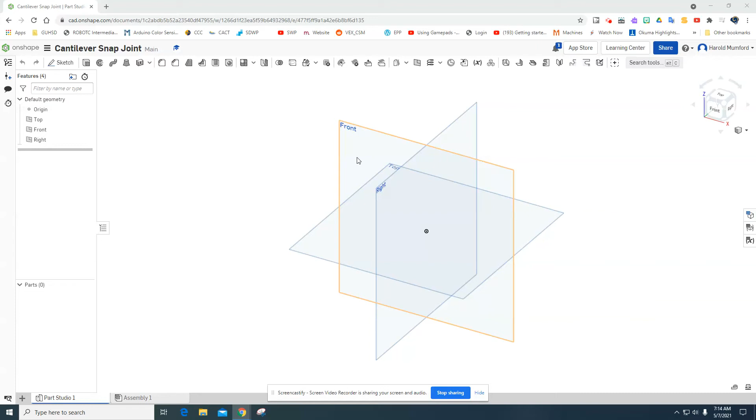Okay, I'm here to show you how to make a cantilever snap joint. Go on, click on front, click on sketch. Click on the navigation cube and bring it to the front.

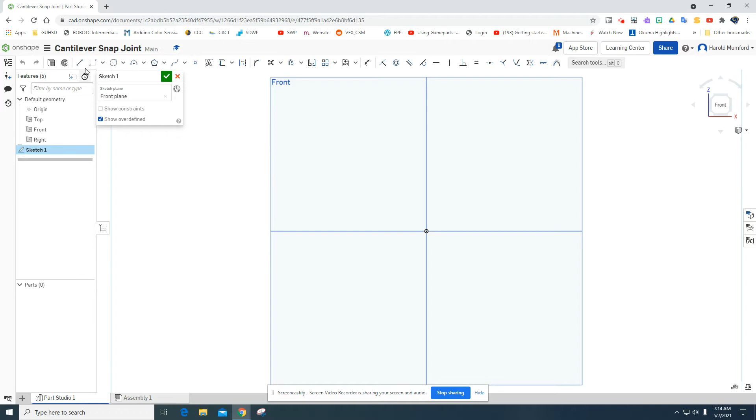I'm not really too concerned about size on this, but I am concerned about shape. So what I'm going to be doing is some profile sketching using a line, and I'll just start a line here and go across over here. I really don't care how long it is at that point. But since I went 4.139, I'll just make it 4. That makes me feel good.

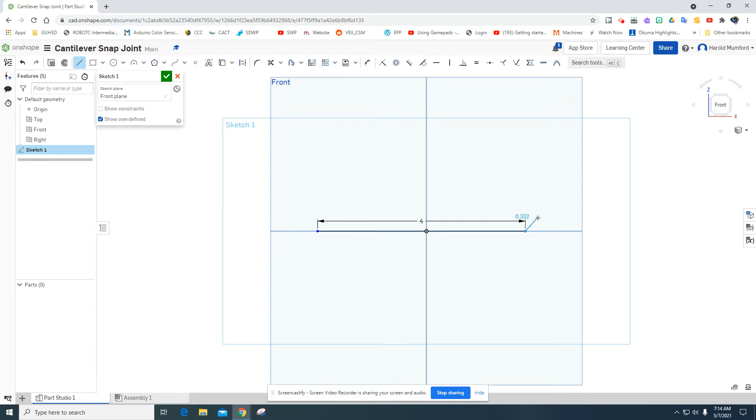Now I'm going to come up a little bit here, and I'm going to give my cantilever just a little face there, and I'm going to come back here just like that, come over, boom, and then come down this way, and then come up this way. And when I want to come up that way, I want to come and bring it. If I click on this, it'll give me little dancing ants, and that way I can be in line with that. Let's do that.

Now let's dimension all this stuff. I'll hit escape. Boom. And escape the line. I'll take this dimension and pull it out because I want to clean it up a little bit.

I want this angle here from here to here to be 45 degrees because that's a cool thing to do. So I'll take my dimension tool and I'll go here to here and make that 45. But if I make that 45, no, sorry, I want this to be 45 on the outside.

If that's 225, I have not done that. So 45 - I actually came really close. So this has to be 135 in there. And then I could pull that angle out and come to the outside of here. There you go. That way it just stays a little bit cleaner.

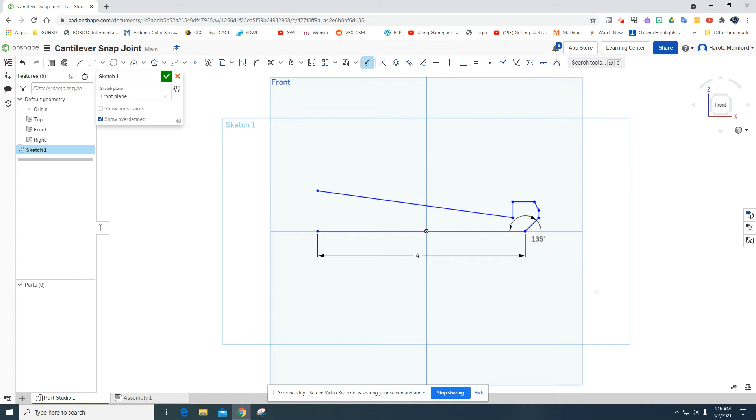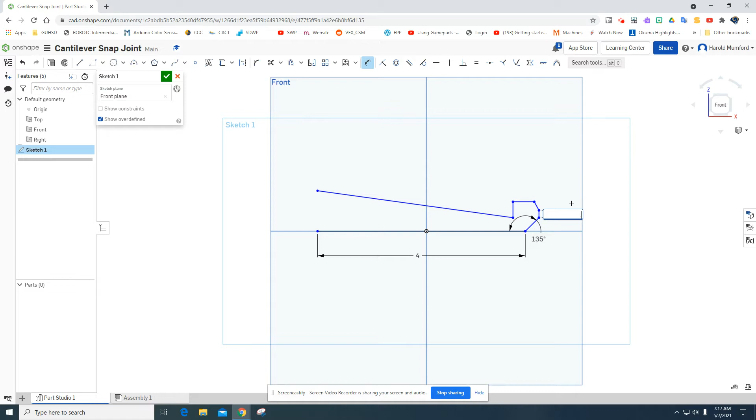Then I want to go ahead and dimension this to a size from here to here, and we make that 0.125 instead of 0.1. That's basically an eighth of an inch.

And then let's make this one a length of 0.1875. And that is 3/16 of an inch. And let's make this 0.5. Just to get closer to what I call nominal measurements, which are normal. You don't want to have things that are way out of line with that.

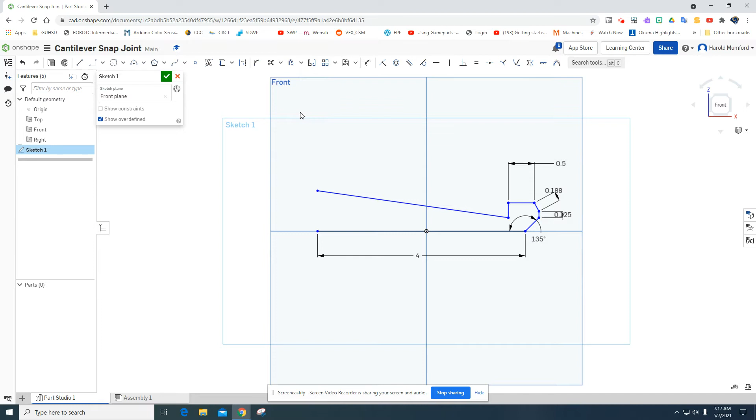And then let's make this angle - let's make sure that the angle here is a nominal angle, something like 15 degrees for this part. So it would be, if that's 15, this would be 75. We go click here, pull that out. That's 81 - make that 75. There you go. And get some fatterness there.

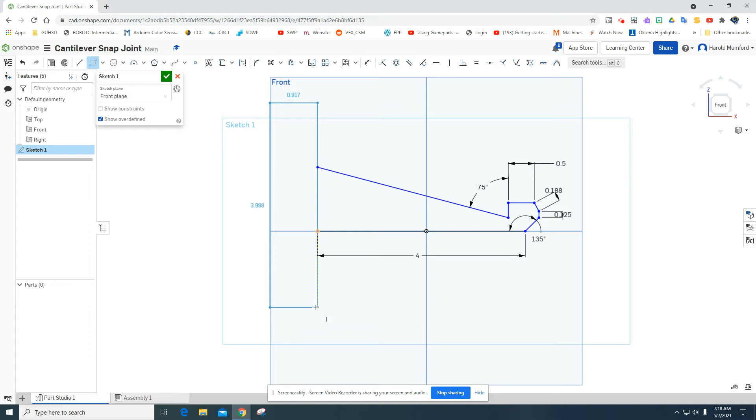All right, and then finally, I'm going to take a 2-point rectangle and just start somewhere over here. I'm going to come down and find this bottom dot, and then build off of that. Let's make this 4 inches. So this part here, let's make it 1 - let's make it to nominal measurements. And then 4. There we go.

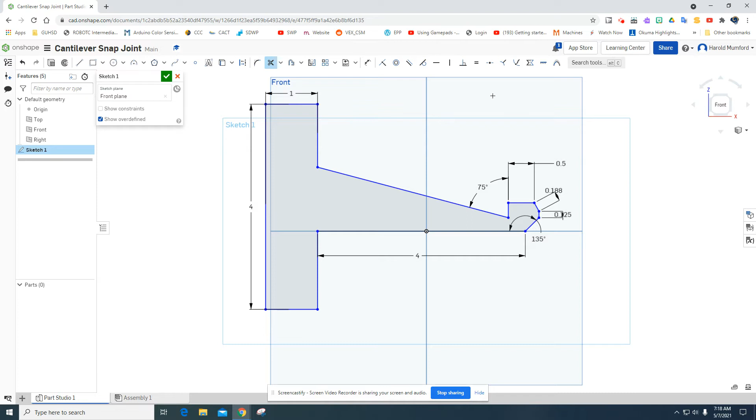I'll hit escape, and that part of sketching is done. What I want to do now is just trim out this little part there, and I have a really nice enclosed face. Then I'm going to save the sketch and go to isometric.

I'll click here, and I will extrude 0.5 inches. There you go. And that looks like a child lock.

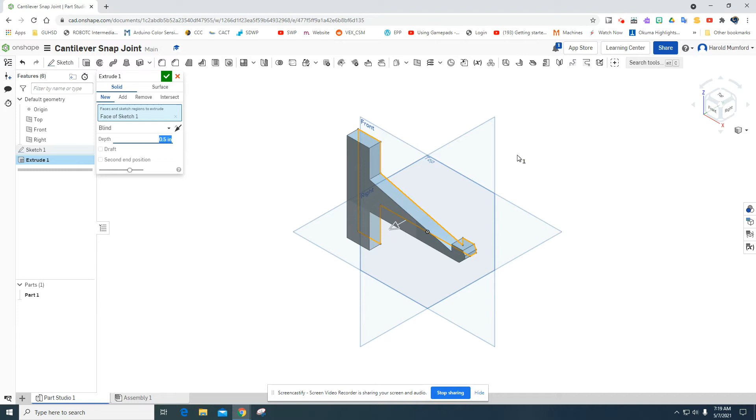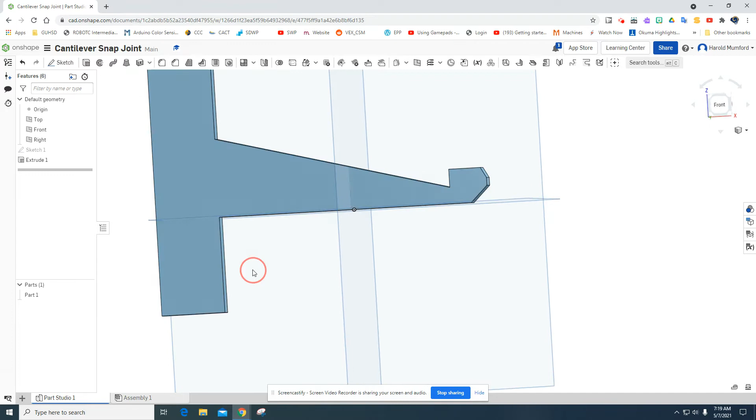Now, one of the things that's really important if you're doing something like this - you need to round off some of these edges, but you're not going to round off these here because it needs to slide through. You also want to put in fillets so that you don't break. This part here is really weak every time it has a square corner, because the square corner actually focuses all the energy on that particular piece of the part, and then it causes it to break.

So we want to fillet it, and we'll take a fillet and fillet that little edge there, bring it out. That's why you see little rounded pieces, especially on plastic and aluminum. Aluminum will break if we don't round off things.

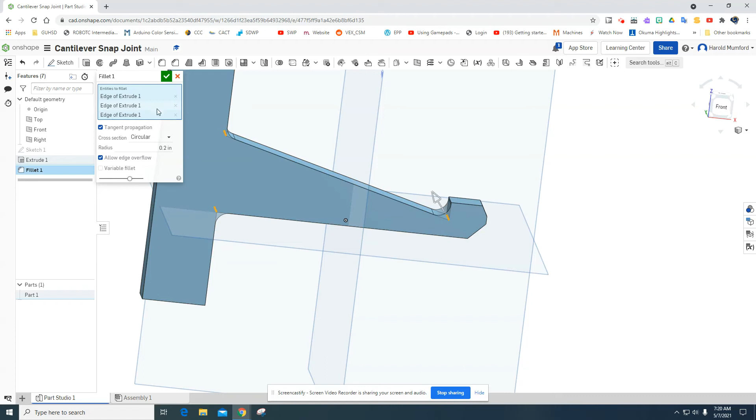So that is a good one, but I want that to snap in, so I'm going to actually take that one off. I want that a lot smaller. So those two I'll make 0.2 - make it a little bit 0.2. Boom. And then the next group I'm going to make 0.125.

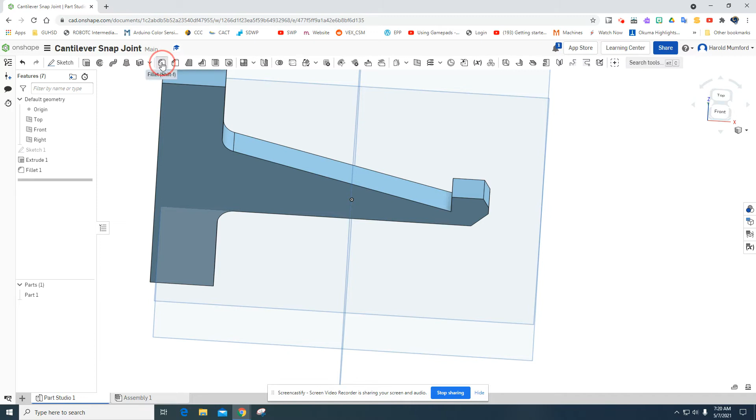So I'm going to choose a fillet again, and I'm going to come in here and fillet that, but now I want it 0.125.

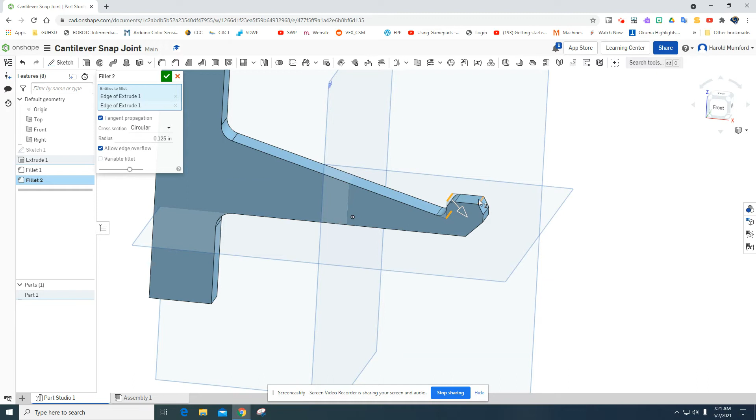0.125, enter, and that's a lot smaller fillet. I'll put the fillet also on the upper edge, and up on this edge, and then down here on this edge. And that just allows this little latch to kind of slide tangentially across the surface of where we're trying to stick it in.

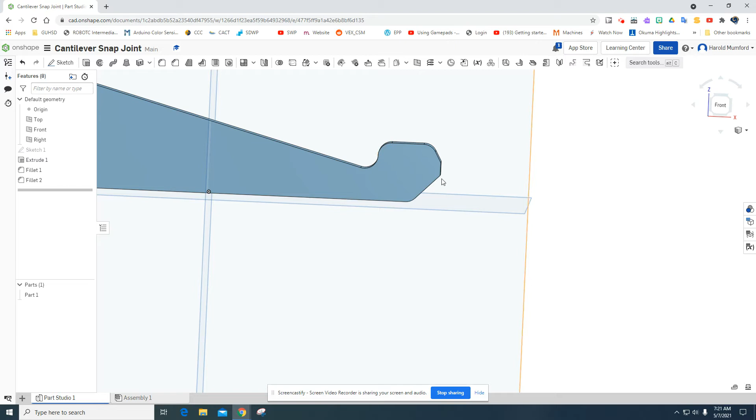Now what we want to do is make part 2 that it slides into. And what we can do is use this geometry here and offset it from the other part. So we'll go ahead and click on the front, again, front, and we'll start a new sketch for our second part.

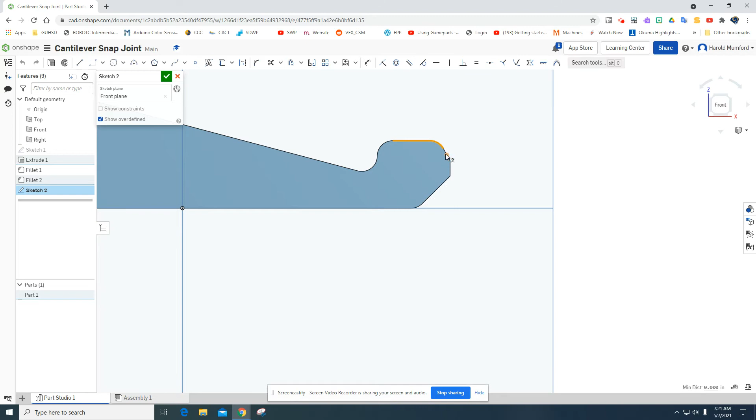Front. And if I click here, here, here, and see, you could zoom in and click on the line, and here, and here, and then here, and I use those. I want to use those. All right, so that gets me to be able to use that stuff right there.

Then on this one, I want to actually come out and do a little corner piece here. So I'm going to take from this line, and I'll build a line that comes somewhere out to there. There it is, I picked up on that part. Boom, like there. And then I want to come from this line down to that. Boom. Then I'll hit escape.

And then I want to come, I'll escape the line. Escape line. I want to go get another line, and I want to come from here, and I kind of want to match up with this here. Oh, sorry, I'm going to undo that, Control Z.

Anytime you get to the point where you do something like that, just hit Control Z. And I'll come here and out to this line, and I want to click on it. I want to find the dancing ants, I call them, the yellow dancing ants. And I want to go ahead and select that like that.

Escape, escape the line. Now what I've done is I created a form that I could offset. I think what I want to do is close it off, so I'll just put a line from there to there. And now it's closed. Then I can hit escape the line again.

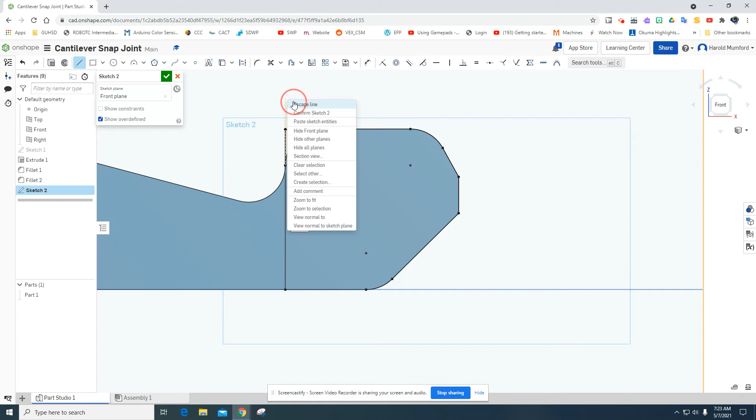And I could take and select this geometry, just like that. Again, I'll do it again. I want to come and go over the entire geometry, and I want to use this tool called offset. And it wants to move that way, but I want to move this way.

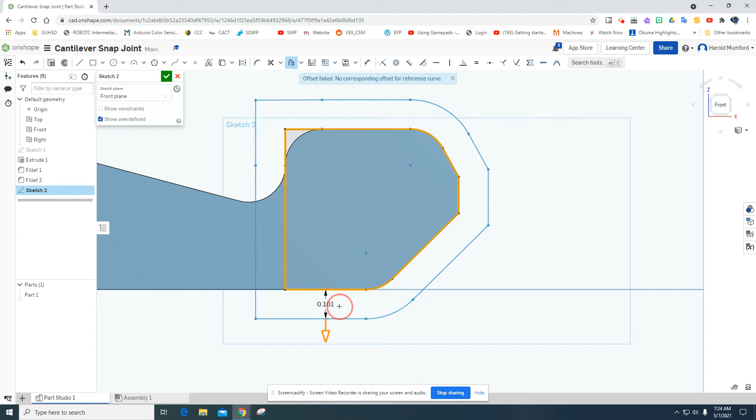And what I want to do right now is move about 0.1 away from it, and I'll hit enter. So if I move 0.1 away, I can actually get some points and measure. So I want to measure from here, the widest point, from here to here.

And that is 0.553. Escape. And then I need to measure from a line, a construction line I'm going to put in here.

And I'm going to go like this. Boom. I'm going to hit escape, escape the line. And I will then make this a construction line, and I will go ahead and offset that.

0.1 from this line, so I want to dimension it from here to here as 0.1. Now I want to escape that particular dimension. And I'll pull this up because we don't ever want to do that, remember? We're going to get really good at dimensioning things. And I get the concept.

And now I need to measure, come down here, measure from this line to this bottom line, and make sure it is 0.553.

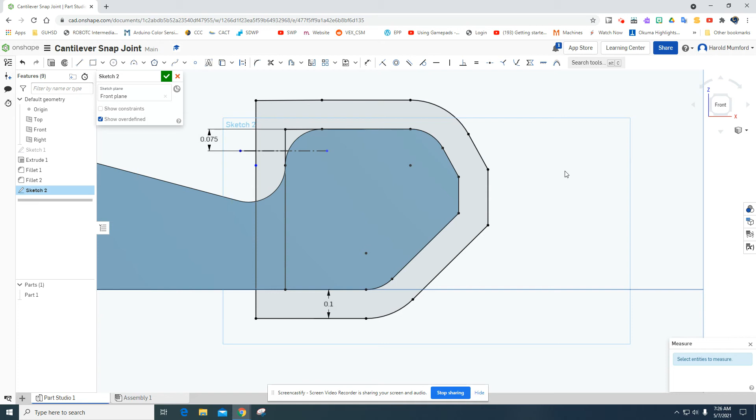So I know now where I want to cut my line for this part. And what I'm going to do now is put this line and toggle it back to a real line. And then I'm going to do some trimming.

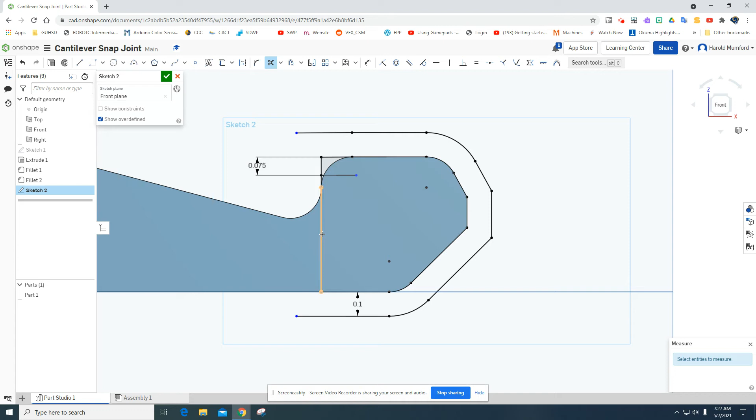So I want to trim everything out. I want to trim this line out, and this line out, and this line out, and this line out. Okay, and then I will leave everything else like that.

Now what I need to do is go do that 2-point rectangle that we've done before, and I need to line it up with this outside line. And boom - oh, escape.

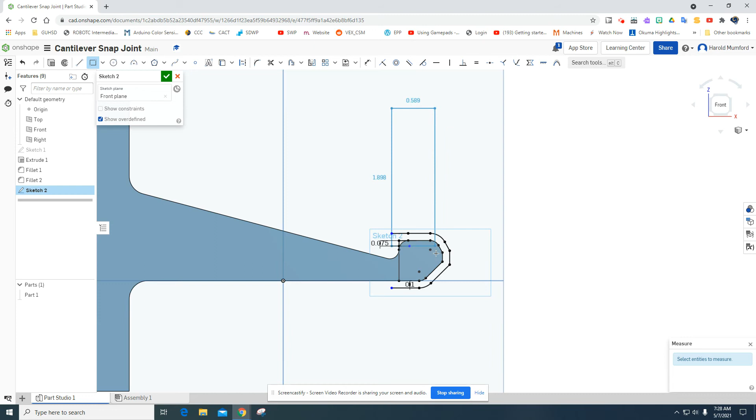Here's what I need to do: I need to get this line, pull it up, and then put my first dot there. It'll go through those lines and come out like this. Then I'm just going to drop the second line and make this 4. Enter. 1. Enter. There we go.

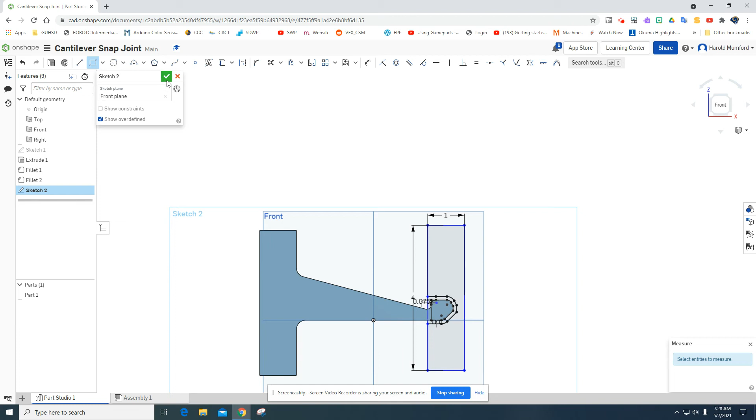I am good, I'm going to click here. Now I'm going to go back into the sketch, edit, and I'm going to make this into a secondary part. So I'm going to go back and get a line and put that line from there to there. And the line is now in there.

I'm going to escape the line, and now come back with the trim tool. I want to trim this line away, and I want to trim this line and this line, and all of these lines I want to keep. Boom. All right, and then I'm going to hit escape.

And I'm going to go ahead, escape the trim, I'm going to delete this. You can see that when this goes in, it's going to pop right up against this top surface, which will be part of that. So I need to trim out.

I need to trim - no, I don't need a trim, I need a line. I need a line from here to here. Boom. Then I need to escape the line, that's what I need to do. And then I need to trim this out here, and that will unclose that surface for me.

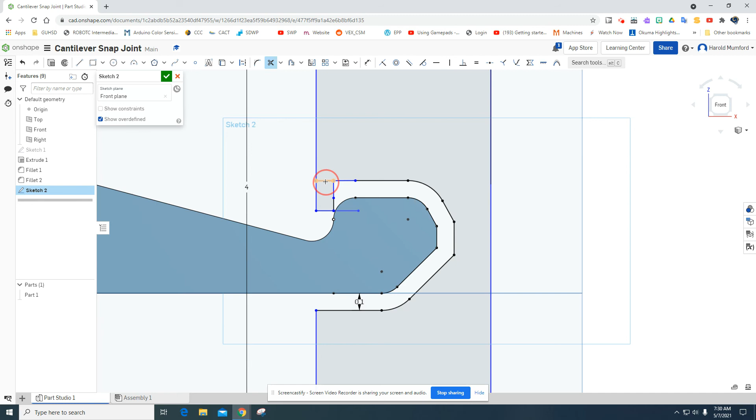So now when I go to extrude, I need to trim this out so I'll be able to extrude this part out. And I'll be able to extrude that part out an inch. It looks good to me, and I'll do that now, and then I'll extrude this part out an inch.

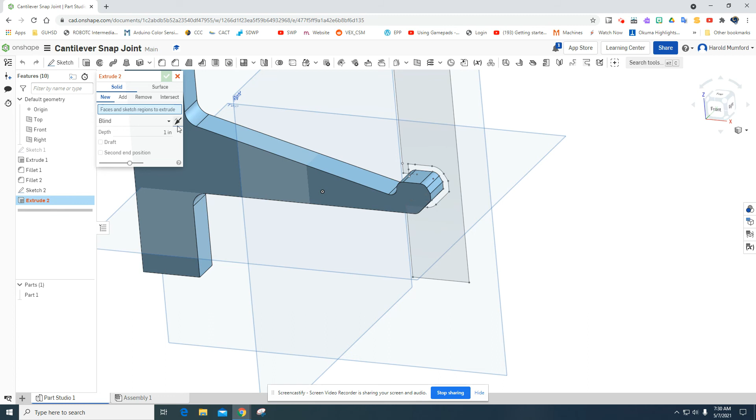And I want to get in that face, I want to change the direction, and I want to make this 0.5. So I have an interlocking, or interfacing, cantilever latch.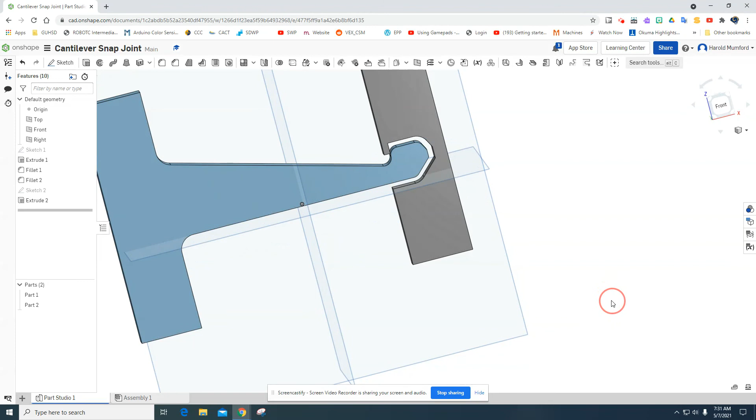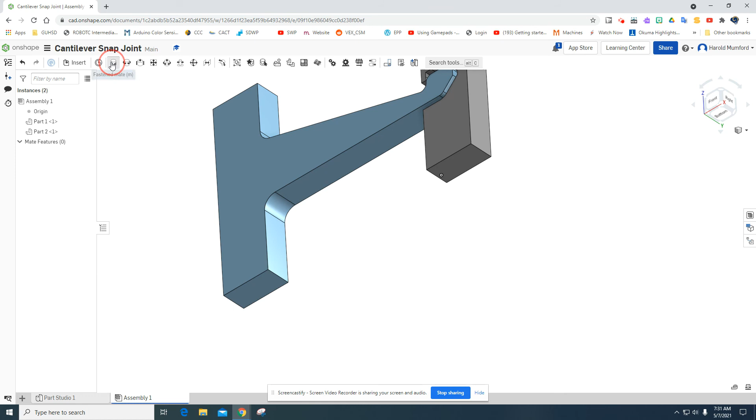Next thing you want to do is go to the assembly. Go ahead and insert the entire part studio just as is. Kind of move this so you could attach this bottom, and you'll save it. Go ahead and click Fasten Mate, click this bottom, and attach it to the top of the origin. There we go, solved.

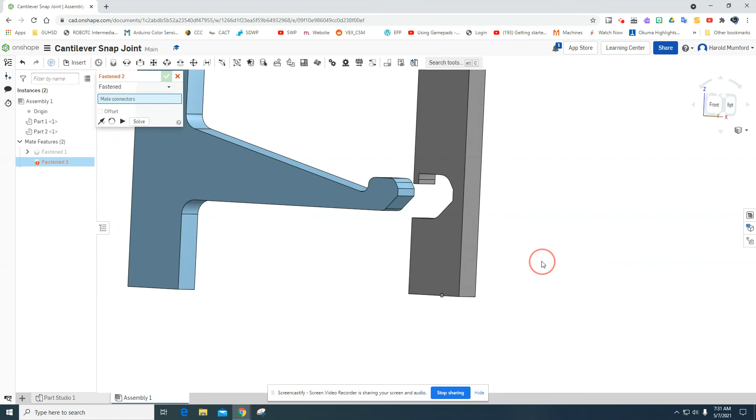Now all we need to do is put a slider mate. We can move this now, and that slider mate goes on the center of this face and the center of this face inside. So I'm going to go ahead and do a slider mate, and I want this face here to slide into this face here.

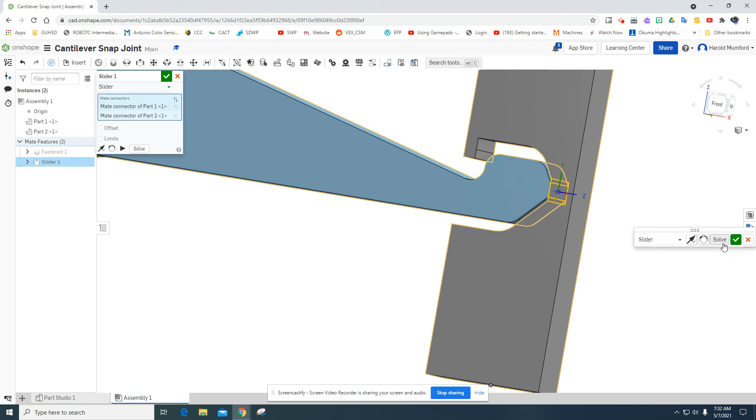But notice when I do that, I have a problem. Let me move this out. I have a problem that the Z is going in the wrong direction - this is going to go through this, and I don't want that to happen. So I'm actually going to force a mate, which is the best way to do this.

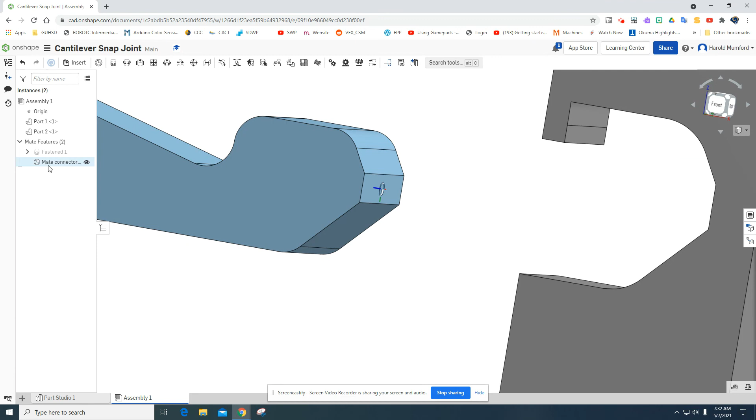I want to put a mate on this face, a mate connector on the face, and then flip it. Now, when I choose that mate connector, I want that to slide on to the center of this face. Now the Z is going in the correct direction. And I will save it, animate it, and show you that it works.

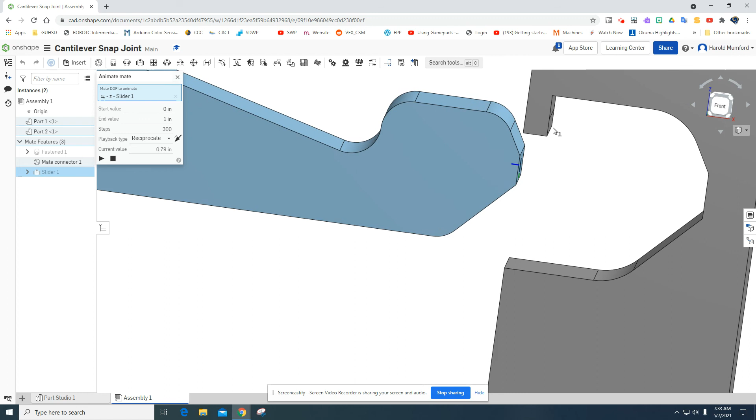Now notice how that's going through. I cannot create a tangential mate in this program - I tried, that would take care of it. But what would happen is when it hits this, it would go down. So I think a little modification to force it down better would be to actually take out a little piece of a 45-degree angle on the back of this to force the cantilever to go down.

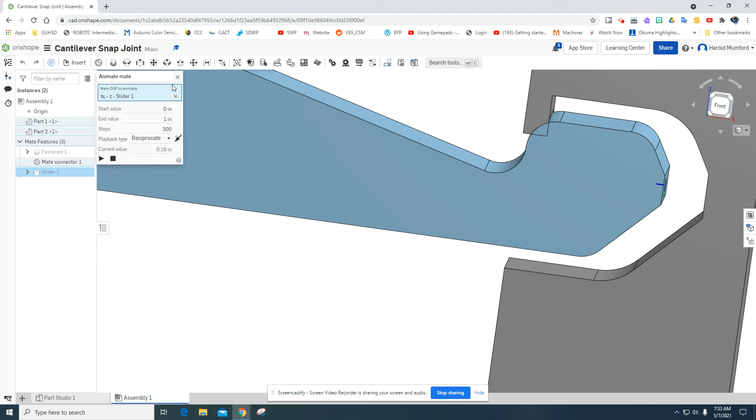So I'll go back to the part studio and I'll go ahead and add that little 45-degree chamfer on that particular part. What I want to do is hide part 1. There it is. And I'm going to chamfer the back of this right there, ever so slightly - 0.05 inches. There you go.

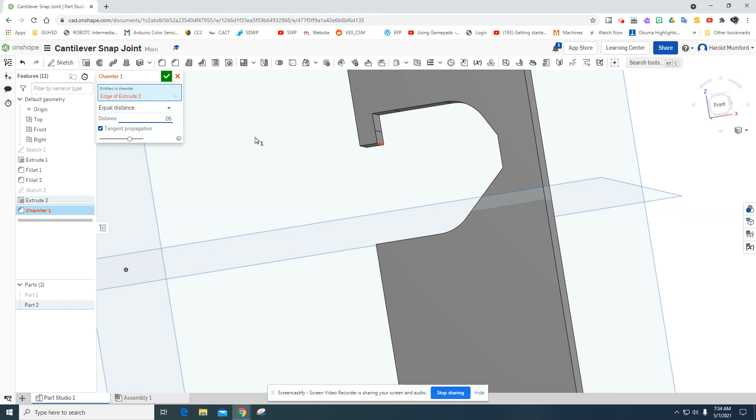That's the way this will make it work better. You'll go back to the assembly, you'll see that that was done there. And I would expect you to turn in the animation of this joint as your project, and actually post this video that you create inside of your website. Thank you.